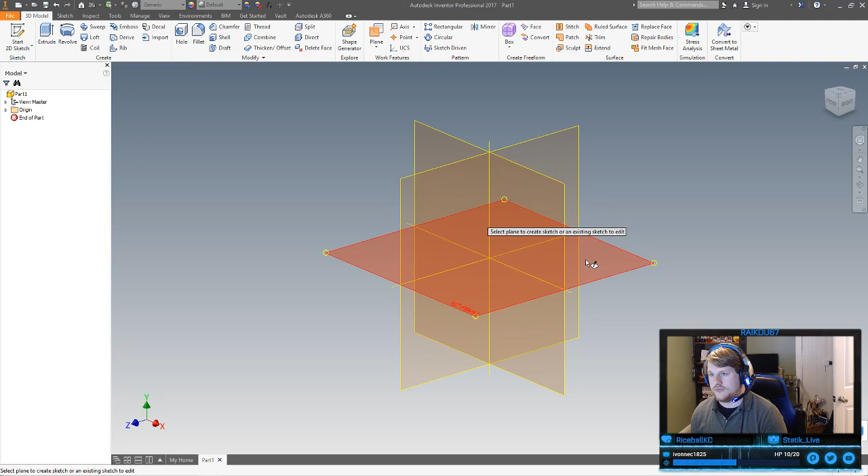Where is my image? There it is. Okay, so I've got general dimensions of the bat to go with here, and we can figure out how big we want it. Let us start base rectangle. I don't really have a good inch size, this isn't going to be to scale, so we're just going to ratio. We can always technically scale up if we need to.

So let's start this bat out with a 24-inch wingspan. And on the ratio of that to height, I'd call that maybe about 2 divided by 3. 2/3. Little smaller, actually, call it... or otherwise known as a half. We can edit that as we need to.

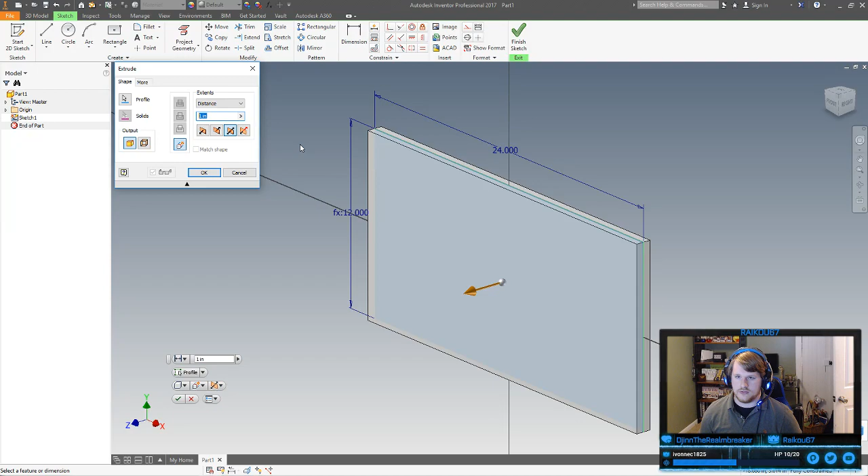That was not my usual defaults, unfortunately, so it's very different from work. Make the bat a good chunk thick, call it 1 inch, and we'll cut away what we need to.

Start on our shape of the bat. It might even behoove us if I was able to put this reference on screen. Unfortunately, I don't really have the time to deal with that. So, cut out our bat from here and get our general batty bat shape going.

Call it there, a curve going the other direction. Come on, we'll play around with those later. We'll get this mirrored on the other side too in a second. The bat has a tip to its wing.

Not the arc. Hold there, one very narrow fold there, continuing on with the same radius almost. Those will be pretty much tangent to each other when we do that. Okay, let's get some constraints going.

This will keep it separate, yet we can have a very slight curve to it. I'm not going to geometrically constrain that - it's the actual shape of the bat. It's more like a tangent circle, so I'm willing to say we could smooth this out later, but that is not what I want you to do.

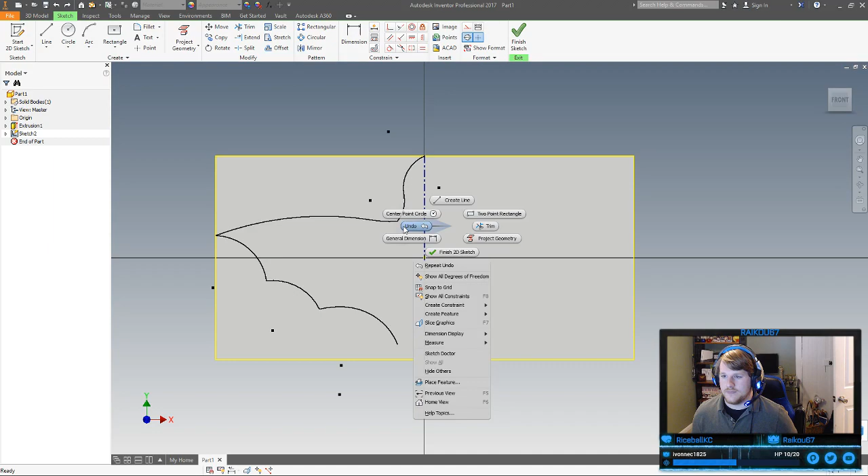We want these tangent as well, just a little curvature. Might need to mess with that actually. Oh no, oh no. Think about this - I might need an intermediate point. I'll round that out later actually.

Don't have to worry too much about that. We can get some ratios going here. Now the good thing about Inventor is it's a parametric modeling system, and what that means is you can set a dimension, and you can set everything as fractions of that dimension or functions of it, so as you change the size of everything, as long as you're thinking about how you're putting these ratios in, it should all scale pretty good together.

We'll use these as our two references: 12 inches and the 24 that we had before. How should we do this? One thing I kind of want to do - the edge of the bat here definitely has a ratio to this. Somewhat like that. We're doing a half bat for now.

This will be a function of... hold on. Might be better to say this divided by 2 is our half distance. Call it almost like 5/8 times 5/8. Yeah, of course that's gonna be a little funky.

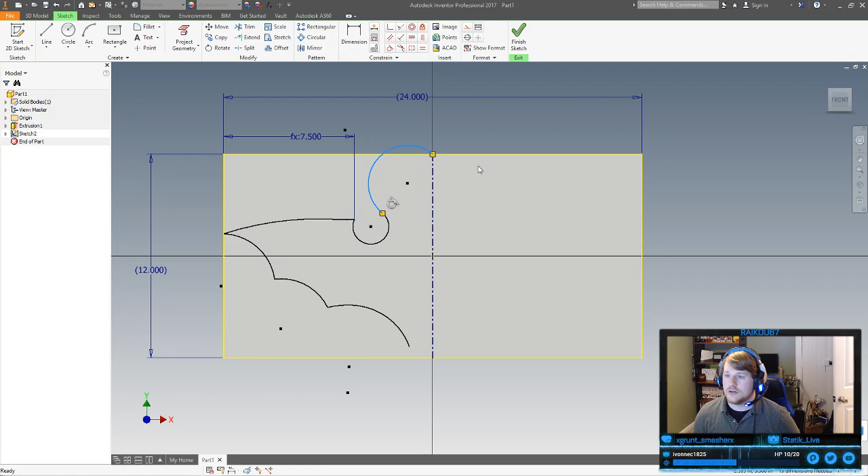We will put the center on here to ensure that's there. This will be funky for a bit, but this definitely needs to be a little bigger, so call it 7/8 of half. Nope, not quite. How about something like 11/16? Getting there. That looks pretty good, okay, good.

Got that - the tip of the wing. By 2, no, this would be like divided by 4 in this case. Yeah, because according to the bat it's actually kind of high. We'll get the peak of this. Oh no, we don't want a distance like that. Alright, now there is some funkiness when it comes to curves, and how we want to deal with them.

Now this is what I want to do here. I'll put a point here so I actually know where these are always. Start a little bit - that should not be a center line, it should just be construction. We can use this. This is divided by 4 over here, so we'll say this is divided by 4, similar height.

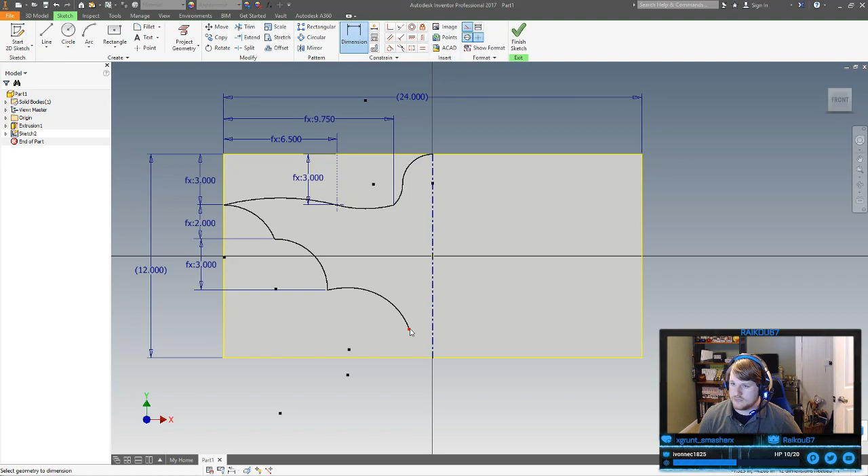This should be closer to the bottom, so we're gonna call this point also at 3. That's still within, but gives us a little bit of room. Oh, no you don't. You could still play with that curvature nicely. Good.

What's the next step? This peak down here is pretty low. Oh, because it's also constrained that way, the way I did it. Its wings are very small compared to its body right now - definitely very small compared to its body.

We'll make sure that this... it'd be nice if that was perpendicular to a line. You are not supposed to be a center line. Alright, so we'll make this perpendicular to control that a little better. Yeah, we'll definitely need a radius there. Very strange little bats.

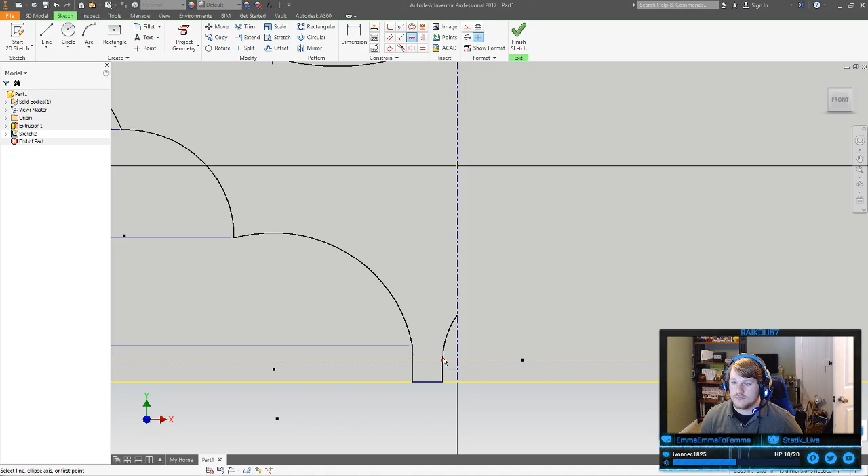Put a little curvature on you, or there. Keep it smooth. Make these same height. Right there. Decent enough.

We'll call this 1 inch of this. So this would be this divided by 24 in this case.

Question cannot be evaluated. Okay, try that again. Try this divided by 24. Ah, numlock. Where'd your numlock go? There we go.

That's not right. 1 inch. Okay.

Interesting. Unfortunately, updating things like that are kind of strange at times. 8.5, 1 inch. Still does it.

Oh, it's looped in on itself, that's why. Okay, we'll fix that in a second. As long as we got something for a start.

We'll call this half of that. He's got very, very little legs for a bat. Head is definitely too large still.

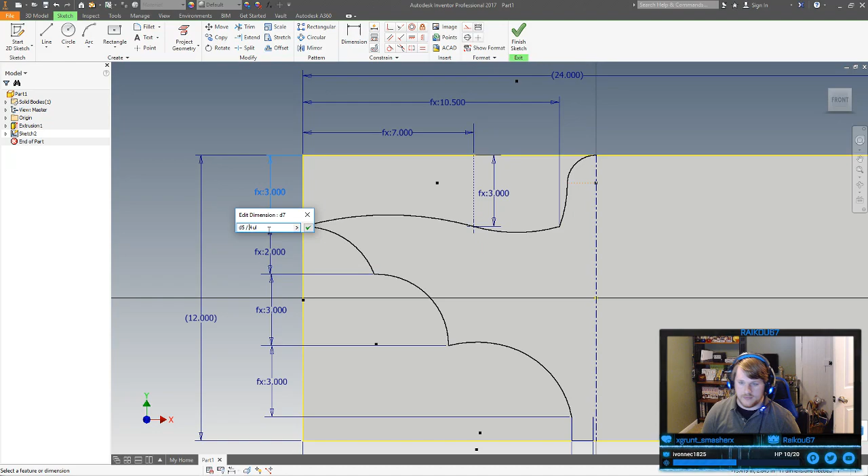Okay, so it's higher, so we can make you same height. We do want this to cape a little lower. Okay, so it's not too bad.

It's fine caped like that, but this will be a little bit bigger. It's exponential.

Good, so that's not bad. I don't actually know why we have a circle there.

Almost better, actually. It seems like we need a bit more distance between these before we start. Something almost flat.

Another radius. Just to make it a tight turn. Flat.

And one more radius. This tangent to this.

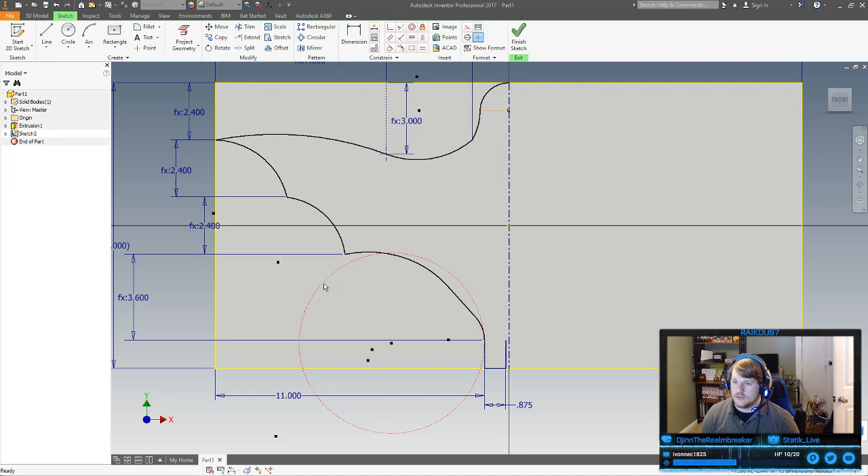And this shall be tangent to this. I don't actually know where this came from. Might have been what was causing our problems, to be honest.

This way we can actually... that should be tangent here. Okay, that's better. So now we can actually change

the length of this to where we need to go. Might almost be better to just kind of lock these points where we need to go rather than start doing things like that.

Just start this process of more like sculpting it. There, take that point, lock it. Starting to throw some of our parametric design out the window.

Purely because it gets kind of difficult to do all these ratios and whatnot. Okay, so that constraint already exists. Good.

Should be able to just manipulate that to where it needs to go. Except that needs to be a little bit smoother.

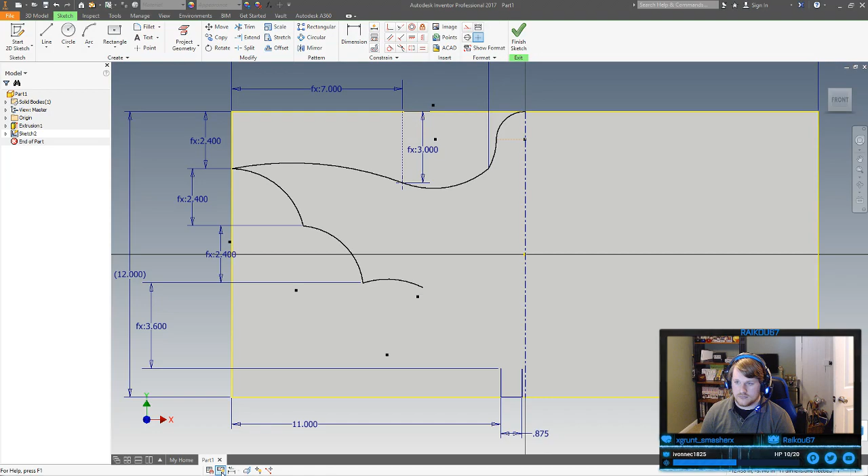No, that's not working at all. That's just not working. Where's that dang constraint? Oh, it's gone already. Okay.

You're a free little one. I think you're still 2 pieces. Yeah, you are. Okay.

Just go back to constraining it this way. This. Darn you, why do you do this to me?

You know you could do that just fine. You choose not to.

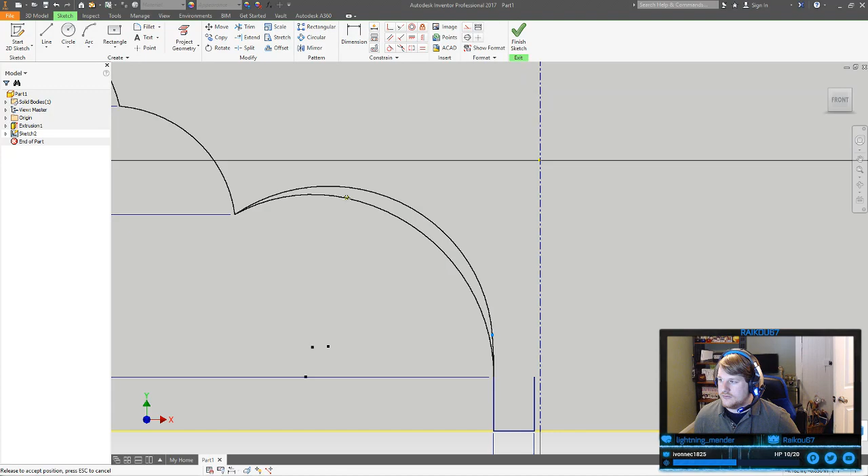Please, yes, good, okay. Got this very steep curve for the time being, but we want it more like flat.

Our main problem is it actually doesn't connect to the foot curved. So once again, I find myself deleting this arc.

Might be better to just kind of move on to something else in the meantime. Change our design approach. Spend all this time doing those parameters and they actually end up messing with us. Going for something more organic after all, so parameters aren't going to always work.

So we'll make this one locked for the time being, or better yet, just 1 inch.

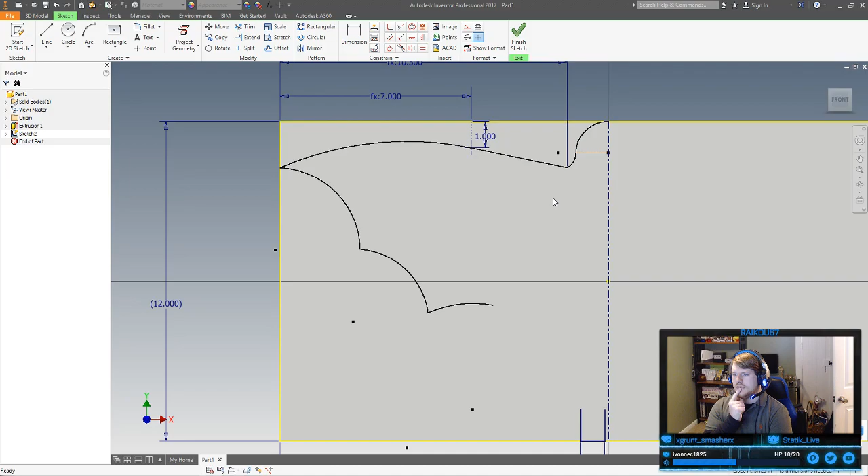I just had an even better idea, a different way to approach this. Hold on, I've been looking at this image the entire time, but there's a much better way to do this that doesn't involve me guessing at proportions.

Sketch again, we'll actually put the image file on here. I can find where image is. We don't even need bat ratio, we can just put bat in here. Input from corner to corner. A little batty friend. It might even be better to constrain you to the midpoint.

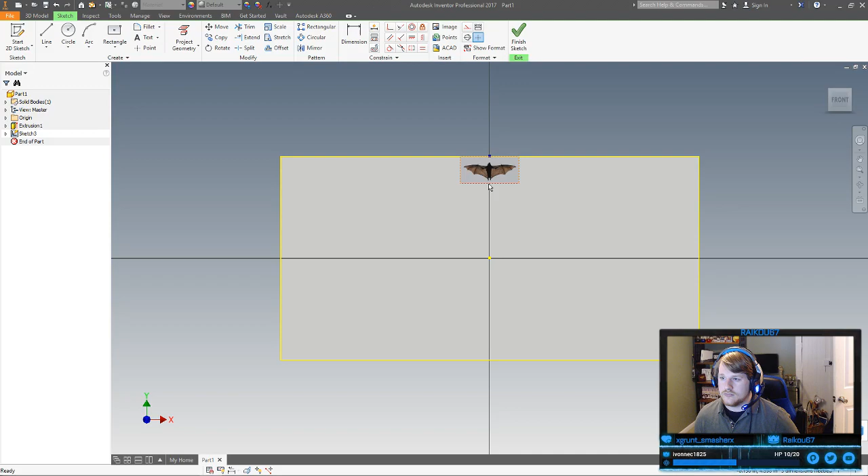It's close, actually, it's very close. Oh, you know as well as I do that that works. Don't even try to tell me that, inventor. And we shouldn't be able to change anything about that. We'll note that we need to add at least half an inch each side.

So about plus 1 inch. Oh, that's the ratio, it's messing me up actually. The ratio should probably be more like 12.5.

It needs to get narrower. 11.5. Almost. I think more than anything, actually, we'd want - no wait, we did want it bigger, so that the wings are almost at the edge. 12.75 should do it.

Pretty darn close, might take an eighth out of there. Yeah, because then we get that tip going at least. Good, so take this, we can - I would say decal it, but it's probably better to just start a brand new sketch now.

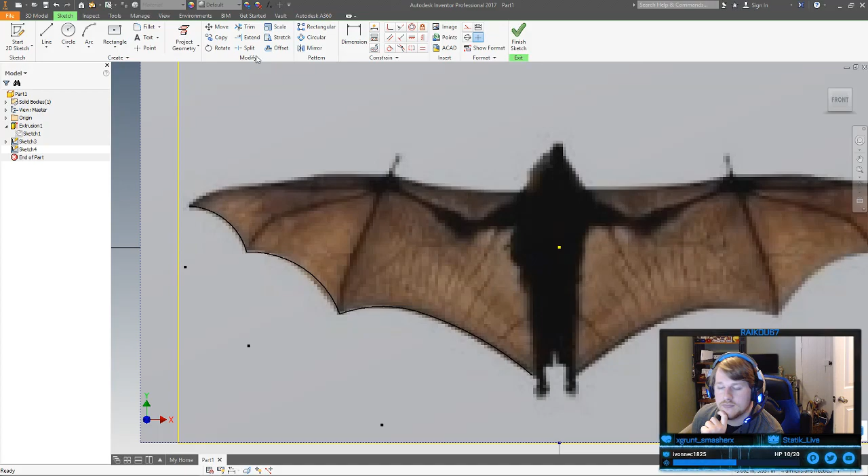Okay, we'll ground some of these points before we absolutely mess up. Ground, ground, ground, ground that, and ground this. Start from this point again. So somewhere around here, we will have to note that there is...

Oh, not quite, not quite. Something more like here to here, because I see a slight curve. Here to here, there's a slight curve going upward there. Come on, you, you know you can do it. Mess with you later then if you're gonna be like that. Here to here. About there.

It's not bad, it's not bad at all. So we can always round these things out later. Let's take some grounding points. Good, good. It's just so we can mess with the curvature later, as long as we know we have this, we can mess with that.

General shape of a bat. How strange, very, very strange. I mean, we can even take this image now and flip it horizontally once we get something centered. Doesn't have to be perfect, just close enough.

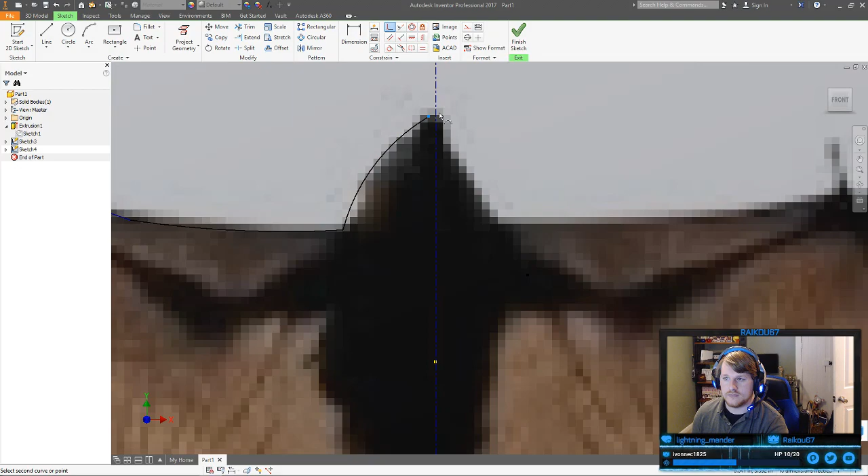Project that. Get the center line here to here. So I will have to - I don't think I actually did anything with that. Just close enough on that.

Comes to your little feet. Pretty much square, but not quite. Yeah, I'll have to mess with that a little more later. More like now actually, we can even just put a radius on that, by locking this point down.

Adding a little more curvature. Not perfect curvature, but enough to get a general shape. Good. Oh yeah, our ratio is like way off compared to this entire thing. Okay, that's fine, as long as we got something.

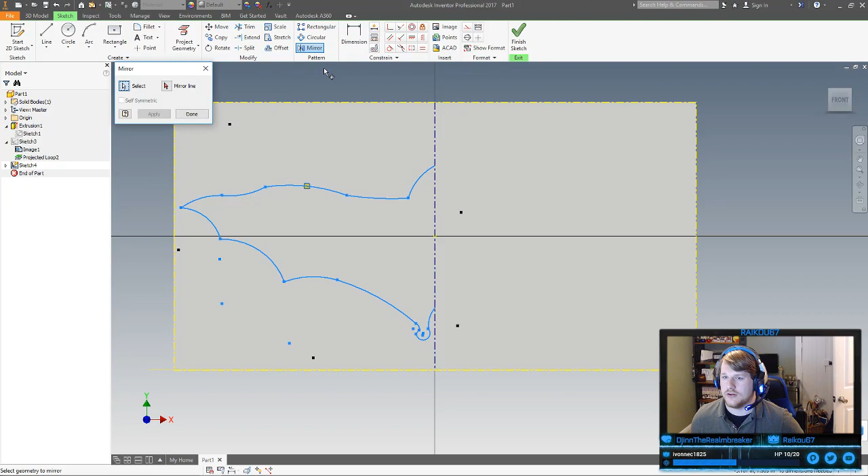Now we should be able to take everything from this side, mirror it. Find where the mirror tool is. Right there. Mirror line right here. Apply it. Done. Good, that's looking pretty good. For a start, of course.

We gotta refine this, so with that finished, take this. Should actually have a closed loop in here somewhere. There, wait, I see it. Come on, you, trick is trying to get it. That, especially when you're working with such curves like this.

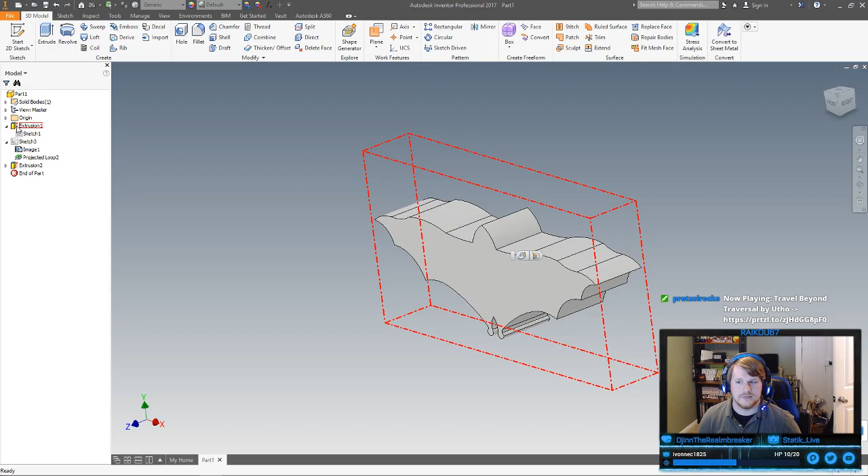That would be our bat. We do the intersection, leaves us with this very, very thick bat. Arguably too thick. Change you down to like 3 inches. Maybe again 2 inches. I say 2 inches would be pretty good.

Cool, so we've got the cutout of our bat, and we're ready to start doing a little bit more detail work, I think. We'll start doing a lot of molding with this thing later, but for the time being, I know we can fix small little spots like this pretty easily.

Well, like a quarter inch radius. Okay, maybe not that much, call it 3/16. Good start, a little fillet to - nope, not that edge. This one, so we can add the fillet. Same operation here.

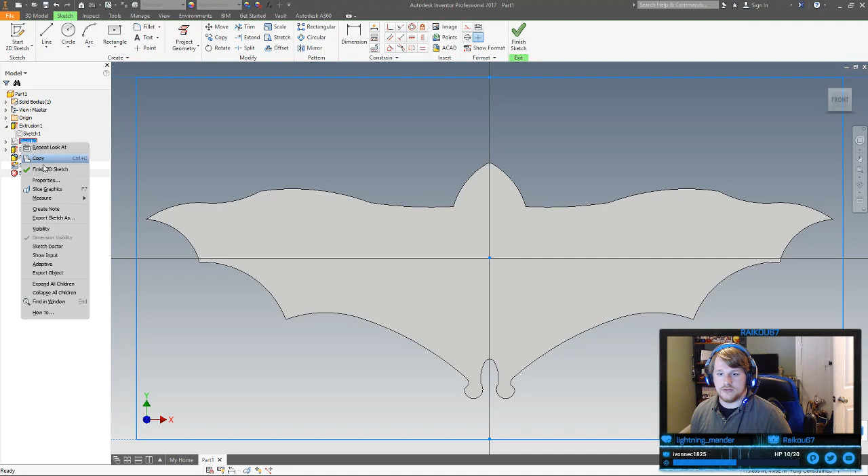So we're actually going to start carving out what the body is out of this. This is where you will be valuable again. Kind of do it again. There to right here. It's the center.

Ah, darn. Unfortunately, I've picked the center line still. You're still on the center line, and I don't want that to be the case.

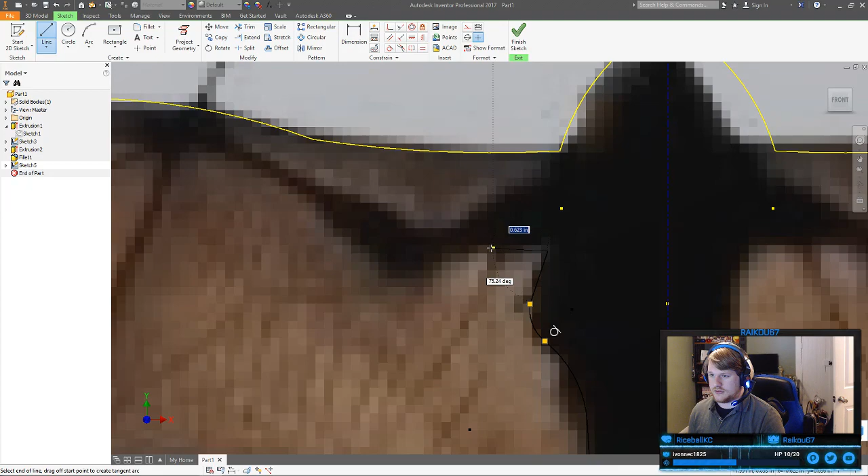Right, there, right. Here. There, to here. Unfortunately, I missed this one a bit. Too much.

For the radius, there, to bring it down for the spine joint, about there. About here, and then finally down here. This side, similar.

Like that. Almost the entire way, but not quite. Like this, almost the same. That missed horribly. There. I do want you to stay tangent if I can help it.

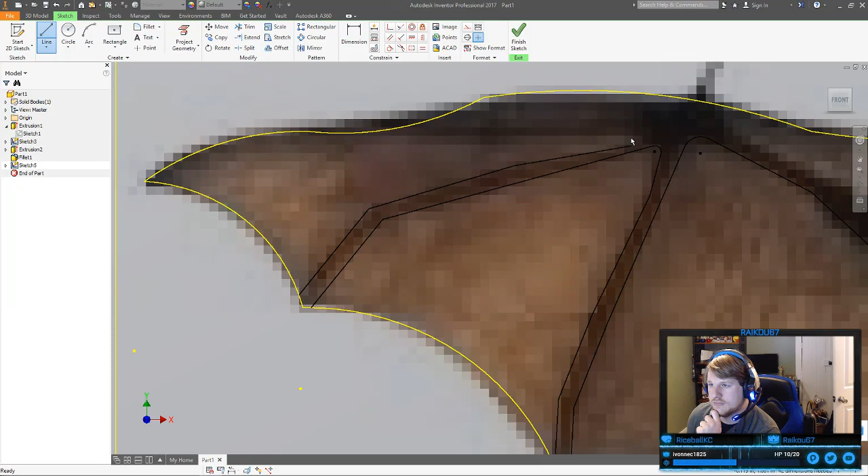There, here, there with a little radius here. Oh wow, like no radius happened there. I don't even know if there's anything there. Just form an arc, tangent arc.

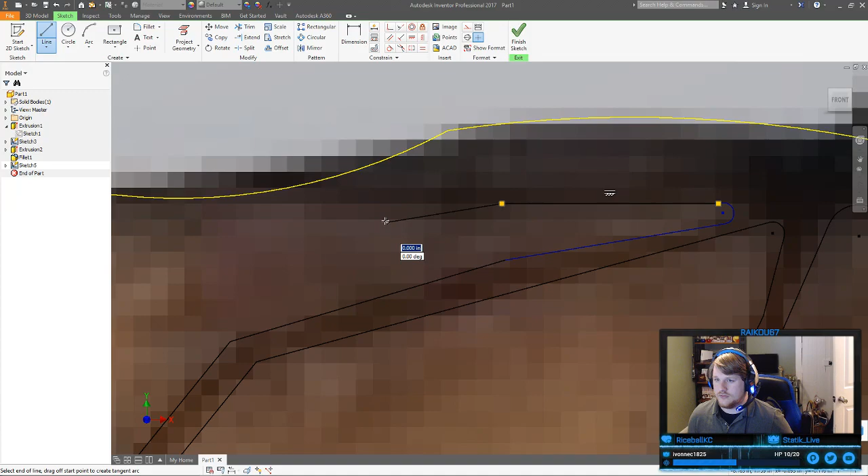I have to ground that, aren't I? Oh no, I'll do that one. Oh, fight me, come on. Don't you dare fight me. This, like that, eh, good enough. Or like this to that to this. Close enough.

From here to here, over here to there. Almost flat across, for not getting the horizontal. Here, a little bit of shoulder. It's a good start, I'd say. A little bit weird on the rib cage. It's okay if it's not perfect, we can get an average from it.

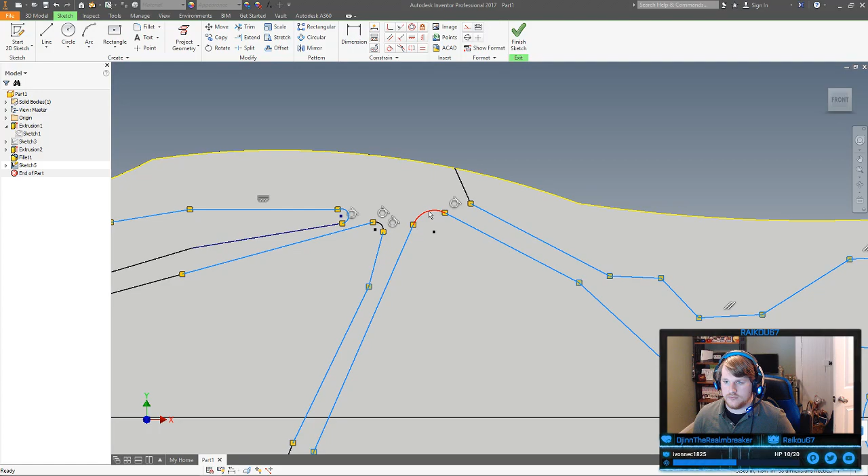So once again, we're going to get rid of these. You're going to make me select individually, aren't you? Better yet, take it like this. 1, 2, 3, 4, 5, 6, 7. These. Just highlight the rest.

I don't think we're missing anything there. Ah, wait, there is. Okay. If we're missing anything, it really messes everything up. Do another mirror move, this line. Apply it. Done. Whew.

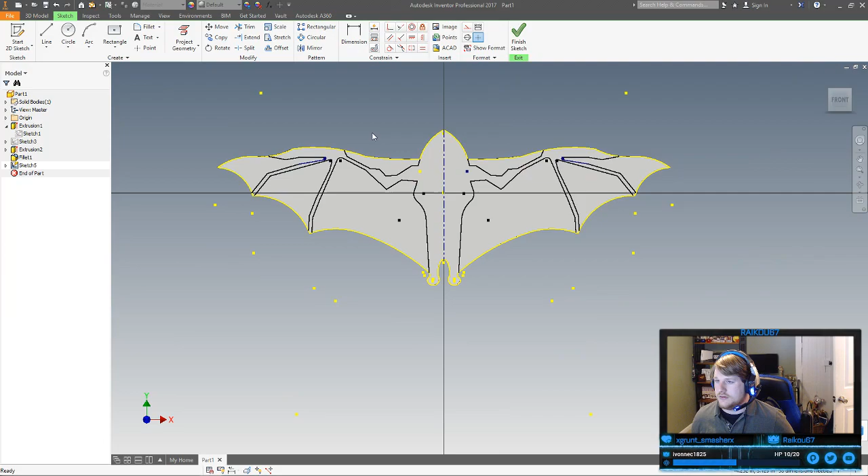Our little bat's starting to shape up, very crude, but it is. We're actually going to take these gaps instead. Not everything's connected over here. Do it a different way then.

Move that mirror operation, and then we'll cut things out again. We're not going to go all the way, say maybe about an inch in.

Give it some texture. These guys' wings are pretty thin from what I remember. We don't even have to remember, we can just put a reference going. Yeah, not really a very good reference there. You can kind of see it on the tip here. Yeah, we've got a hat in there too. Very thin, very delicate.

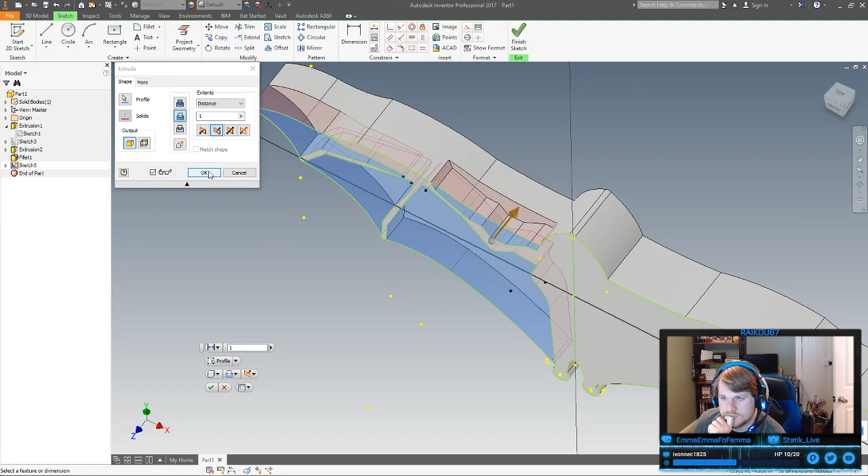Take this, mirror it a whole different way. Just plane, because everything is centered. We're starting to get the shape. Good. Definitely have to blend some more things together.

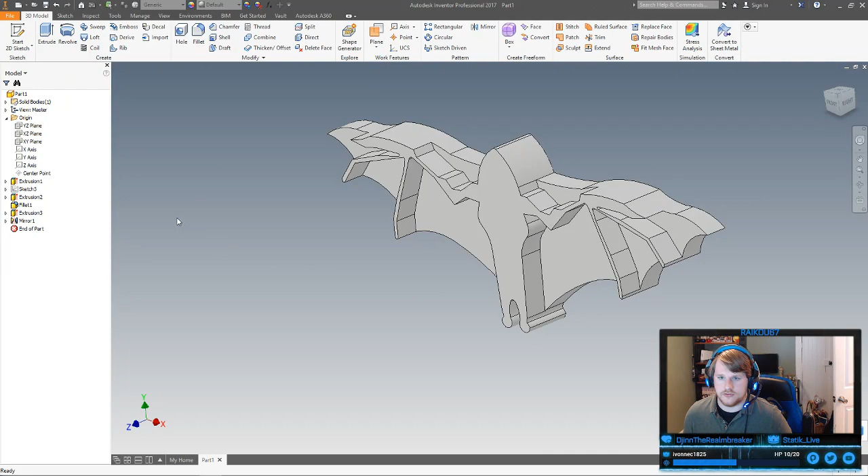Next step would probably be... well, these veins aren't actually supposed to be this long, now that I think about it. That's one thing. Is that maybe this should actually be a lot thinner than what we're doing. Let's revise this once more, like an inch. I mean, at that point the bat looks a little thin, but we can block him out a bit more, so that's probably the next thing we should do too.

Because we have a lot of this existing geometry, we can kind of just work with what we have. Here, we'll do it this way. Just pick the geometry we want at that point.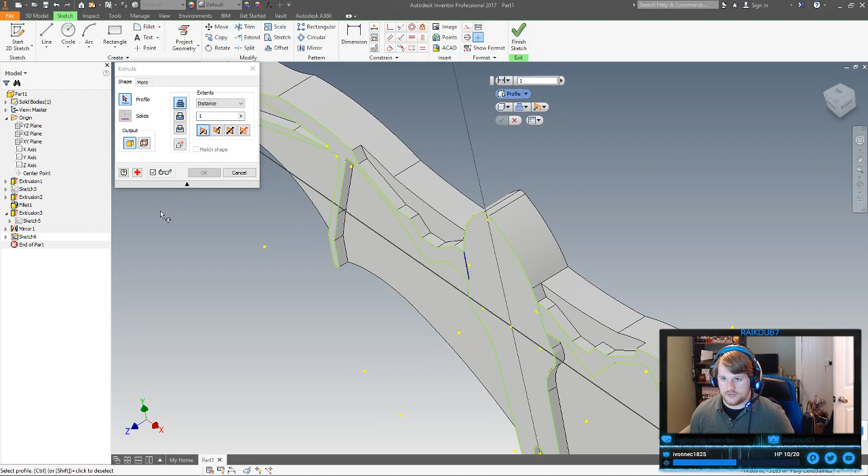Where are you? Right there. Here. Got a nice solid feature here. We only care about... ooh, something's not connected there. Not connected here or there? Either. You're supposed to be connected.

Redo that line then if you're not going to connect. There to there. Okay, once more. There you go. Profile, good. Bring you out like half an inch.

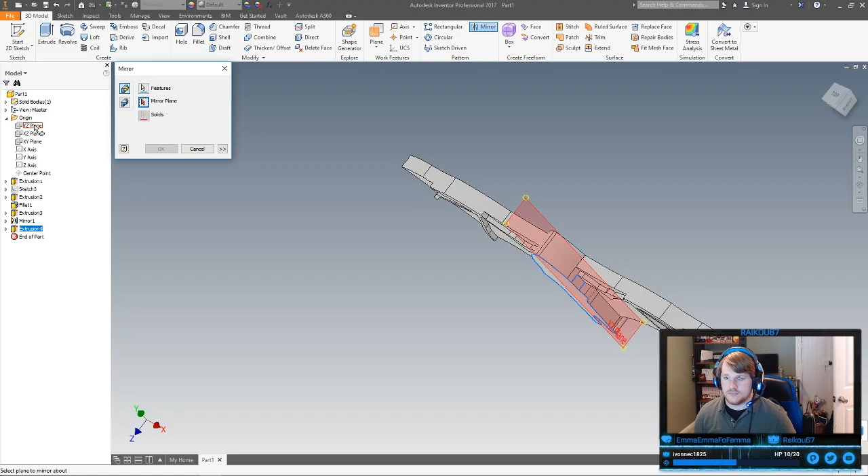Probably on both sides even. We'll mirror this extrusion on this side. That's not the right plane. Want to mirror on this plane so it comes back a little bit too. So now we've got the wings in the center of the bat, and his body's thicker, but his wings are thinner. Good, good, and we can actually even make those wings even thinner, I believe.

Just do a little more, make him a little more delicate.

Now, well, I'm not sure. Okay, so we're going to look at this other bat reference, the other bat references we have. They definitely bone out a little bit. Oh, we already have that one. They definitely bone out a little bit, so they are transparent if you shine a light through it. But most of that structure is on the insides, but they're going to have a little bit of protrusion outwards when they're doing it.

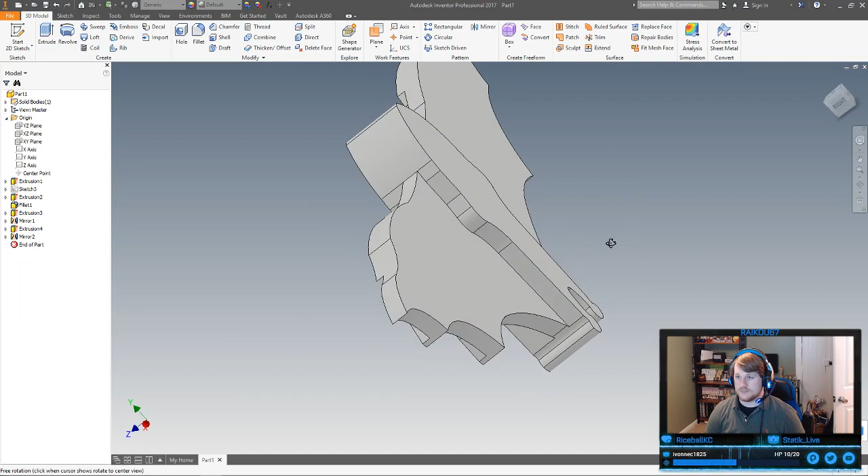We'll take this, we'll say that's going down. Probably sketch on this plane a bit. Utilize this, utilize that. It's really just the points that are coming out.

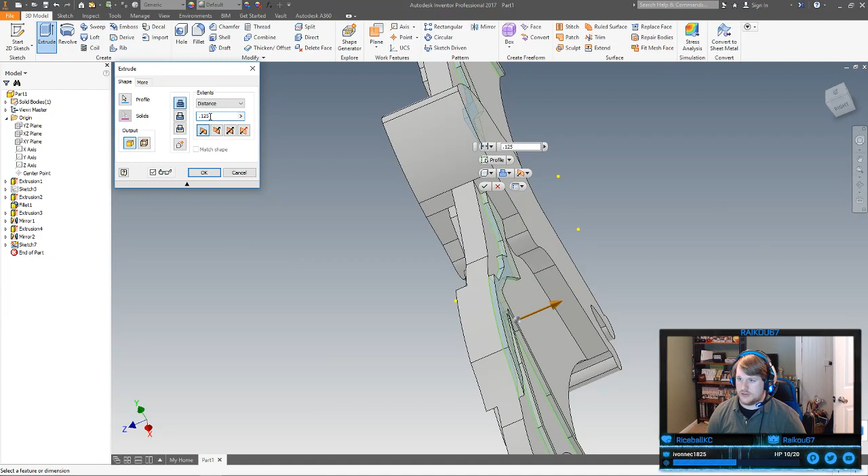This being the front of the bat, this being the face, this being the back. It's not too bad.

Alright, from this point we haven't done any saving either, so that would be good to save. We're gonna do this as bat, animal, and we're not gonna finish this in one stream. I already know that the whole thing, the bat, the hat, the baseball bat, probably not happening today. This is a lot of trial and error that's going into this right now.

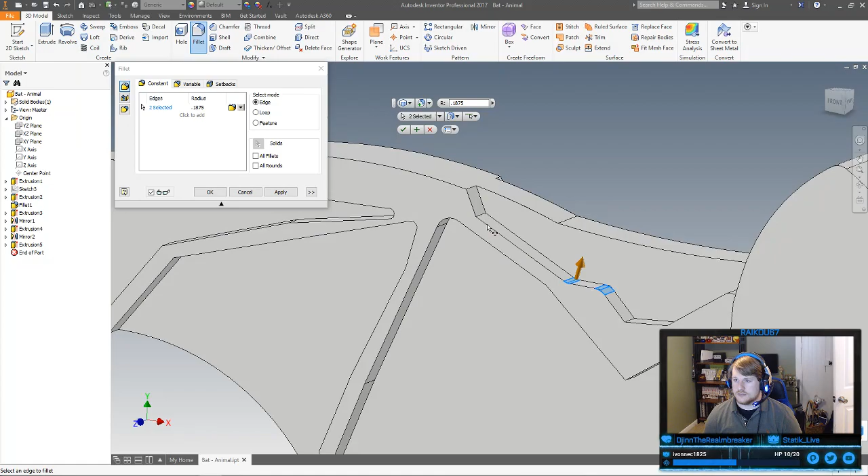Would be good to get general bat features in there though. Let's start working on rounding out some of these harsh points. But, well, I mean, that'll work too. Pretty much everything's gonna need a fillet.

Just little by little. Round that out too, because it's a little tough. There's maybe a little bit we can extrude out of there.

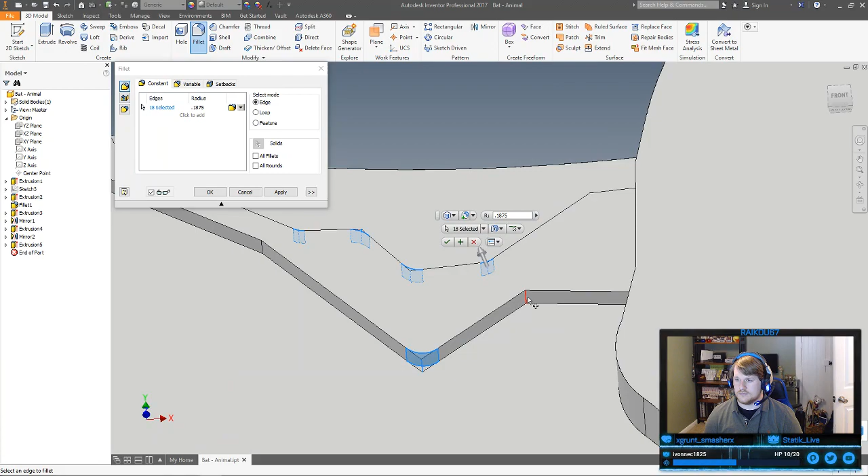See how we feel about this if we were to do this as like 0.5, just as a severe round. Maybe even more, to be honest. Might be good.

Isn't the most efficient modeling, because I should have done this a little sooner. I should be able to mirror it again. Yeah, no problem.

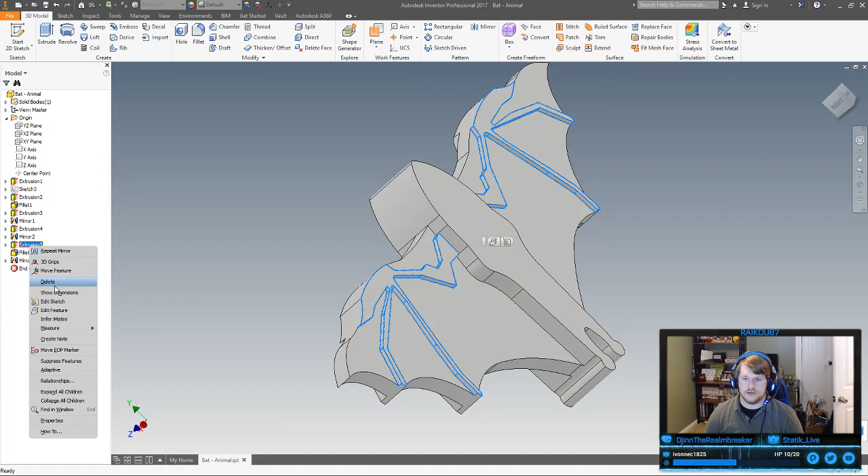Don't think we can mirror it on the mid plane though. Oh yeah, that already looks a lot smoother. Good, yeah, the back plane probably should have done that first. Here, we'll actually delete that extrusion so we can try once more.

This and that, get all the radiuses on the backside then. Extrude that out. Good to go. Yes, much nicer.

We'll do the next round of this, which is going to be a lot smaller. Yeah, a lot smaller than that too.

Just kinda realizing that this thing is not really... yeah, come on, you know you can do that. Alright, if you're gonna be that way, we're going to actually change you really low, just so we can grab this radius.

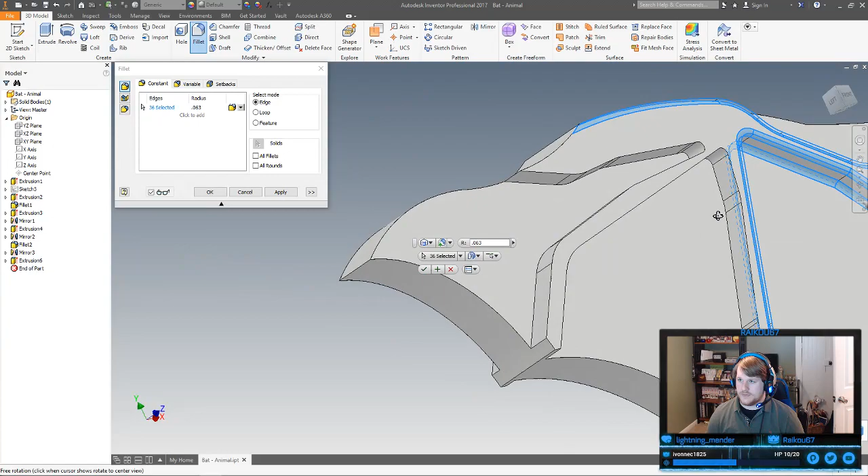Yeah, some points are on the thinner side. That's not going to exactly work because of these little thin spots. We can fix that a little bit by making... well, unfortunately, I screwed myself there.

So take the lock off of it. Just kind of... ooh, no. Eh, better off leaving it as is. Working with it.

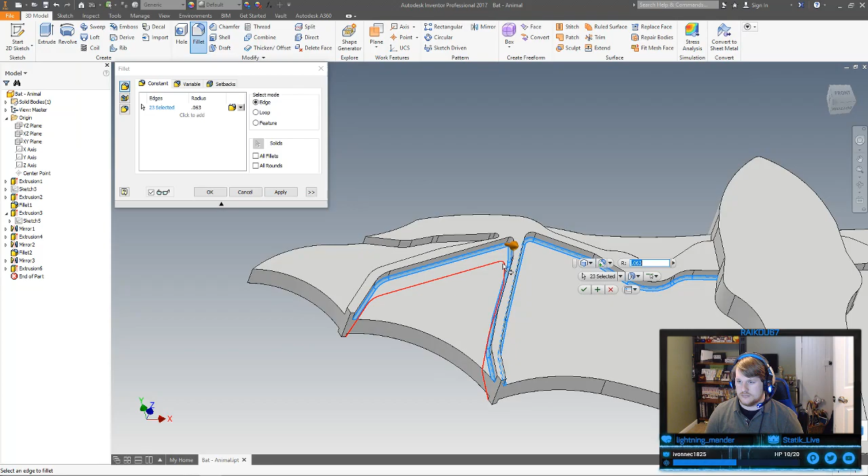Which might have to be a little bit different about how we approach this. It's nice when they all line up too in that area. Just get the whole edge.

Oh, Waz, how you doing, sir?

3D printing is definitely a possibility with these things. It's really just a matter of after you're done with it, if you save it in a certain format. I do not own a 3D printer, but it is definitely a thought for the future.

Not cheap, unfortunately. Right, I already see that there's going to be a problem here. Oh, apparently there wasn't, so we'll keep going then. Once it turns red, there's usually an error.

Yeah, we're just kind of trying something a little different today with some 3D modeling. I do this day in, day out at work, and it's something I'm decent enough at where I'd love to share it with everybody here.

It looks similar to Revit. It is, this is Autodesk Inventor. Revit is similar, it's another 3D modeling system. All of them start to look the same after a while. It's really where your tools are in your toolbox. The whole logic's the same. Autodesk, so I shouldn't be surprised.

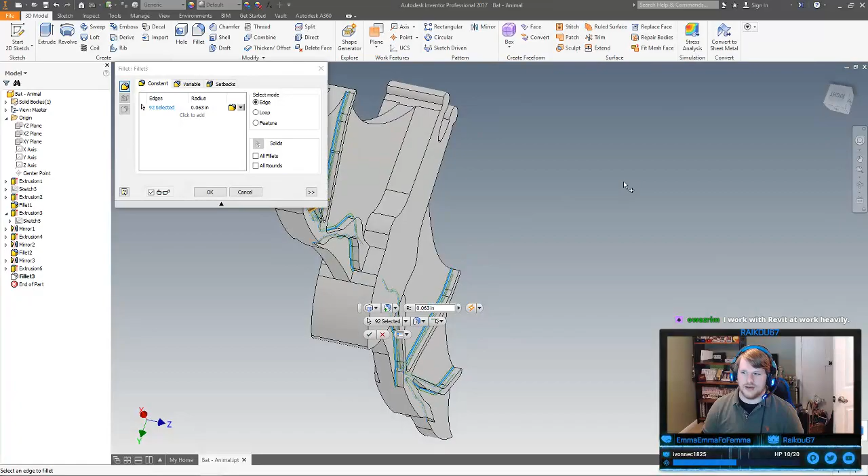I got a free copy from work, so yeah, Autodesk Revit is... yeah, there's some from the same product line from what I remember. You work with Revit at work heavily. Okay, good, so you're someone that works with spinning things around in weird angles then, I'm sure too. Having to look at it from every freaking angle.

Alright, a little softer. Is that gonna work, or are you gonna throw an error on me? Looks okay, we take off the... oh, my view's not here.

Unfortunately, I don't have everything set up the same way as at work. They just do shaded, can't really see those lines. It looks pretty nice, but we'll keep the edges on for the time being.

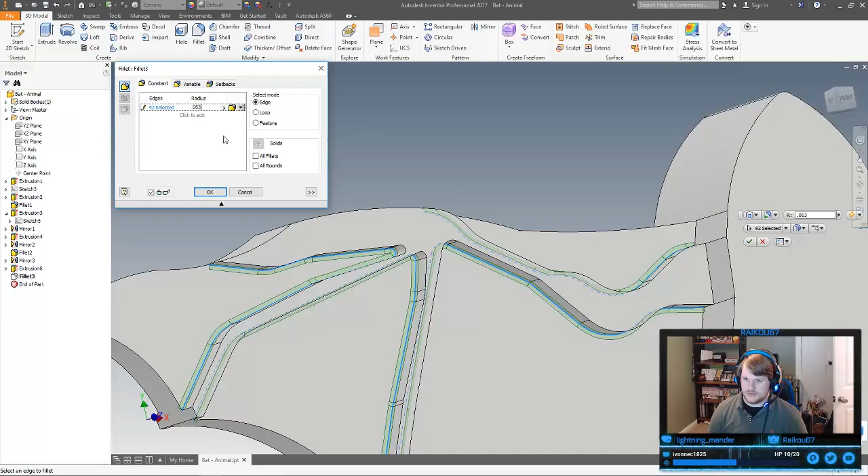Oh, there is actually some fillets that I missed, it didn't generate. That's one, usually it throws an error, so it's very strange that it just flat out didn't do it in some spots. It's definitely a new one. Get some of these top ones too if we can.

Yes, we are taking on our good old friend Spanish Vanguard's challenge of doing a 3D bat. Their very first creative stream. It's also our first time using Pretzel for music. Let's see if that actually generates. Okay.

22 edges can't be done, okay, so we'll cancel that and we'll have to do it separately. Maybe we'll round it out a different way.

Now, unfortunately, Inventor itself, not Autodesk, I think Maya is actually in the Autodesk family, doesn't really lend itself to organics as much. It does have face modeling and whatnot, so we'll try and play with that a little bit, but not sure how easy it would work out in Revit. Again, I'm not as experienced in Revit, but if it's anything like Inventor, it would probably work decent.

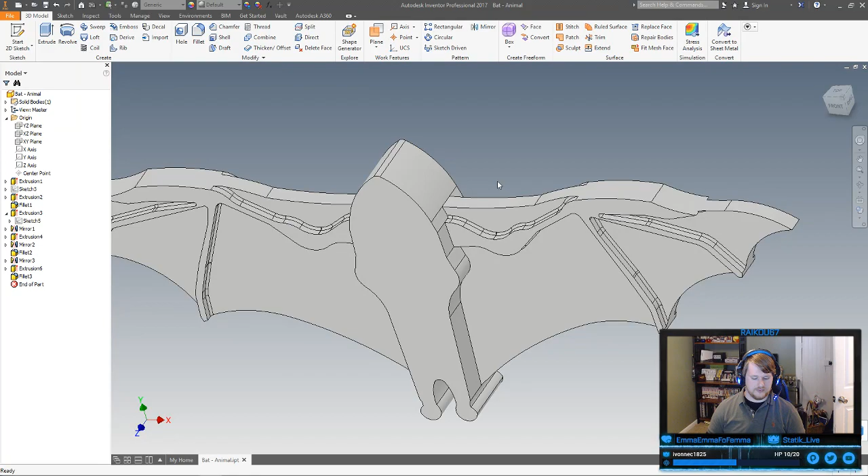You might have to brute force it a bit, like I'm kind of doing. Maya would probably be the best place to do this, because that's actually designed for game designers, and you can flow a lot easier than you can in Inventor. But it also doesn't have a lot of libraries that Inventor has.

Just trying to figure out how I want to continue the softening process. One thing I can do, I could take these fillets, and I believe I could just transfer them to the other side with a mirror if I place it well.

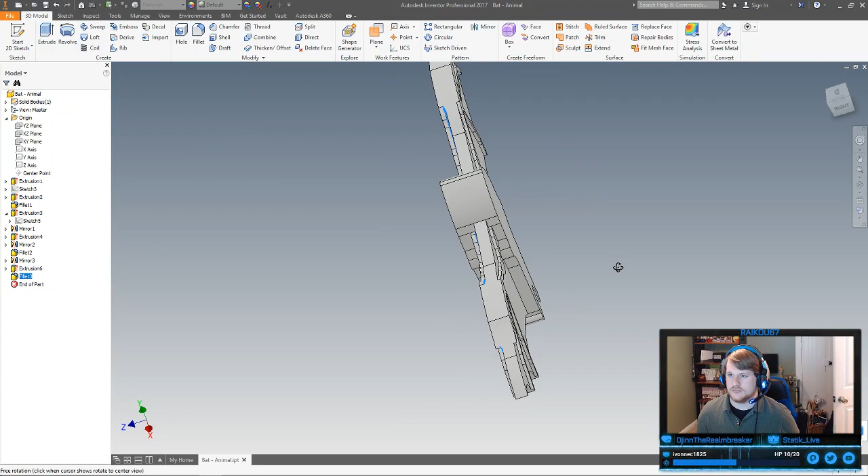No, maybe not, they come in too shallow. It's okay. But I accept a challenge. I'm convinced that you could still do something decently organic in Inventor. It just might not be as easy to do.

And when it comes to these round edges here, it still feels too thick for a bat. For the wings. Like very, very thick for wings. Alright, that's a little better.

Extruding and voids would be the way, not sure about fillets. Yeah, fillets work for general softening, but of course they have their limits, because if things clash, they're not gonna work. I'm guessing these are curved voids. I guess that's a way you could think about them. They're just kind of rounding out, putting a radius on the, where two planes meet at a line.

I think it might be better to save this for when we go to try and surface model this in freeform. But I gotta figure out how I want to do ears on these guys, because they do have very cute little ears.

Facial features and ears, that might be better modeling it. Well, I mean, everything's modeled here, let's be real. Yeah, not sure Revit can do fillets. I mean, if it can do sweeps, it can do fillets, because it's basically like sweeping a curve along the entire edge.

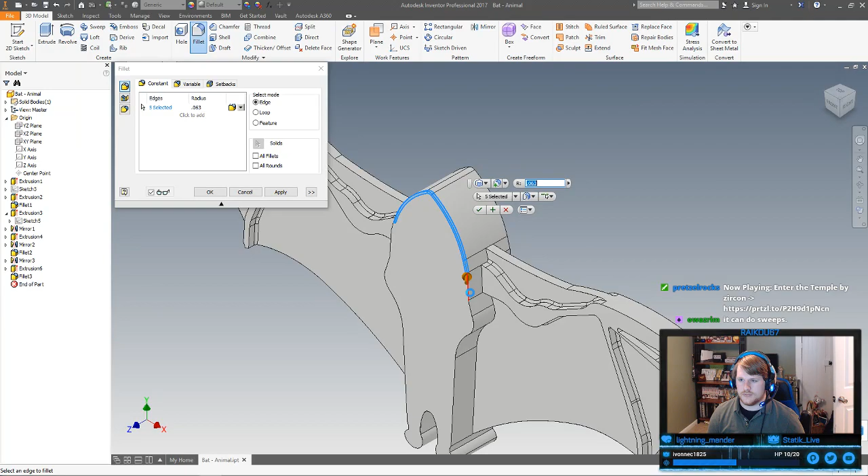Alright, we'll start rounding out some of these edges instead of the actual body, because he's not going to be a thick boy.

Seeing some errors already, though. Might not take. Might be due to these discontinuities. There, we'll try and fix those first. Soften them out ever so slightly just to get those discontinuities gone.

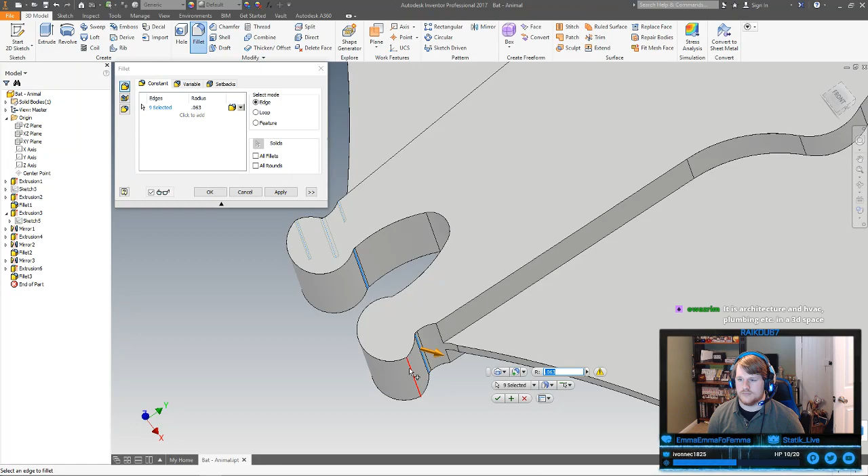That one's already continuous. Unfortunately, the way I started this out was relatively messy. That's already continuous, that's continuous. This isn't, that isn't, this is. That isn't, and that's already done.

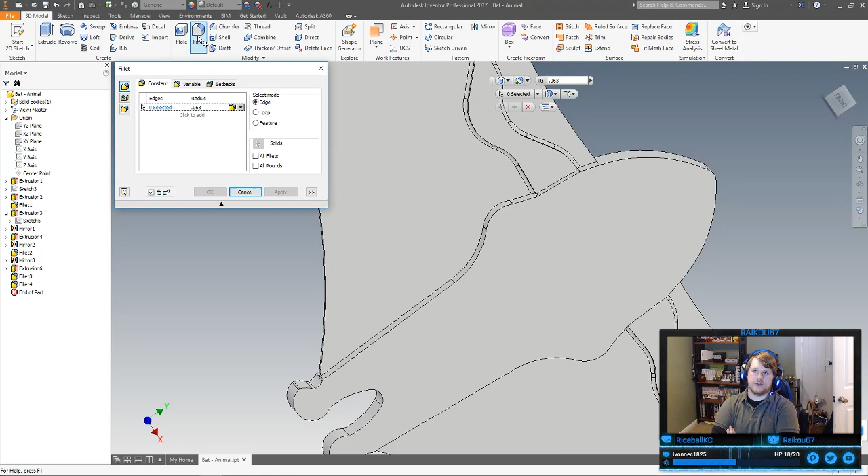It could do sweeps in 3D, it's architecture, HVAC, plumbing, etc. in a 3D space, so we see all the walls, doors, windows, etc. and structures, so everything can be coordinated before it goes out to the field. Okay, so yeah, you're still working in 3D space. In an environment like that, it doesn't sound like you would really have a big use for softening edges with fillets or even chamfers, so yeah, I can see that.

Alright, so we know we can get this much going, and then it starts getting discontinuous here for some reason. But it works fine now. That is so strange that that was not working before, but now it is.

Heavy, heavy, alright, not too soft, huh? You only want to go so far with me. Okay. Well, no, that works, but I do need to continue the fillets on the other sides here.

Anywhere there's discontinuities.

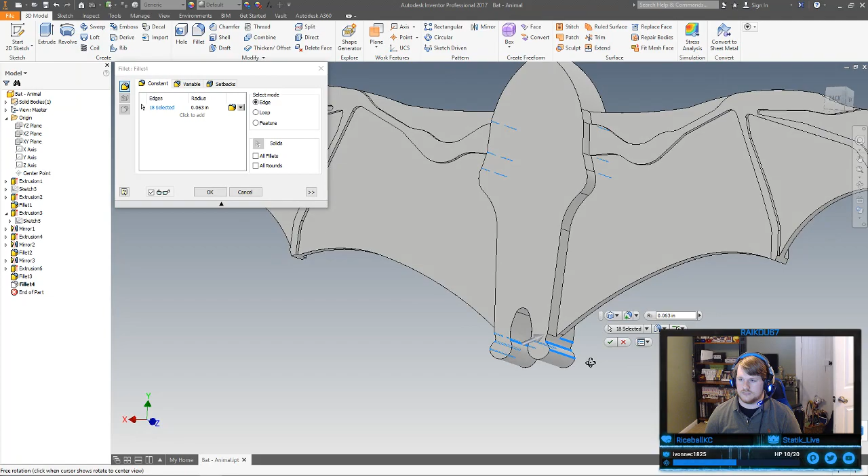That's not going to do anything in that one. Alright, it's a good start.

Yeah, it was probably because we were getting too... This is still going to be very rough right now. As long as we could start getting some curves in there, that's going to help in the future, I think. Should, anyway.

Yeah, some architects get a little too excited and make things way too detailed, and that's kind of what I'm trying to avoid. I think this could be a good spot to start. I know not everything's softened up, but this could be a good spot to start playing around with...

Hold on, let's see if I can... You're not going to let me select everything, are you? It's stupid. Do it this way, then. Invert all of these. Oh, you're not going to do it to me either.

Oh. Oh, wow. I really hope this doesn't lag out the stream, actually. Oh, wait for it to respond for a second. Dang, okay. Yeah, that's one problem with Inventor, it crashes very frequently, too.

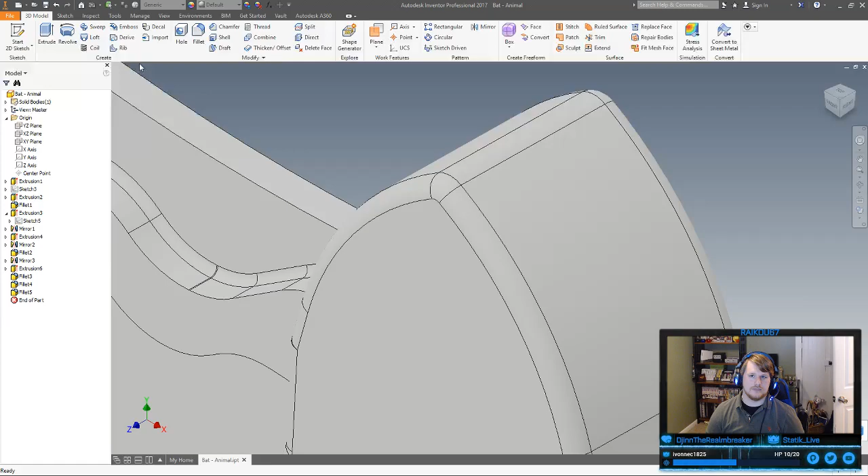It's usually a setting that allows you to do it. What a fine mess you have here.

I'm actually gonna try that one more time. It's gonna really screw everything up, I already know it. But I might have made it way too soft.

But also the problem is that it's right now trying to do 4 faces in each direction, which obviously we have a lot more faces than that. And we'll see what happens. So yes, it's going to go through this black screen again.

That looks nasty. We're going to have a very fine mesh, like 32. It might be too much to calculate.

Wish I had a copy of 3D Studio Max, can really do some nice stuff with it. It's really nice having this home copy, I'm not gonna lie. I might have to go a different route with this.

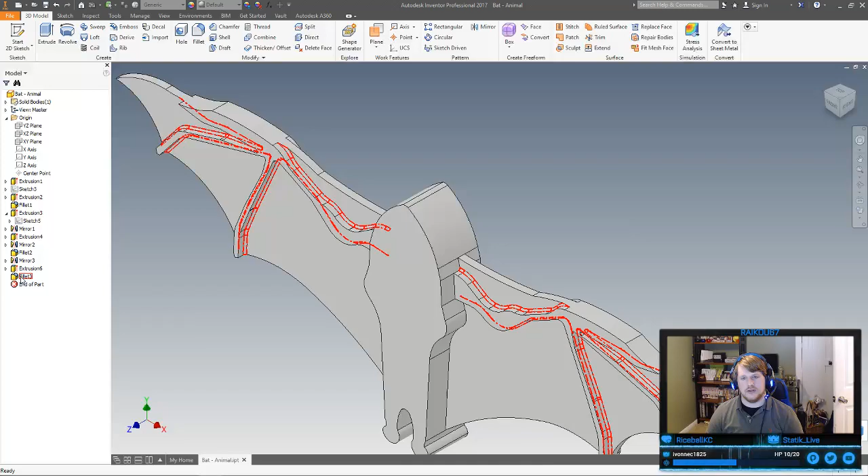Alright, we're gonna try something a little different. We're gonna say screw it to the softness on this, and maybe even on the wings here. We'll suppress it for now rather than get rid of it.

I might have to undo a lot of softness in general, actually. Yeah, I screwed myself by trying to make everything soft already. Because of all these dang curves, it's screwing me.

Alright, well, save here so in case something happens, we can go back. We'll take off some of these big fillets that are screwing with us like this. Yes, it's going to mess with the extrusion. So it's going to get rid of the one in the back.

Actually fixed it rather than got rid of it, so that's good. And we'll try one more time with trying to convert everything.

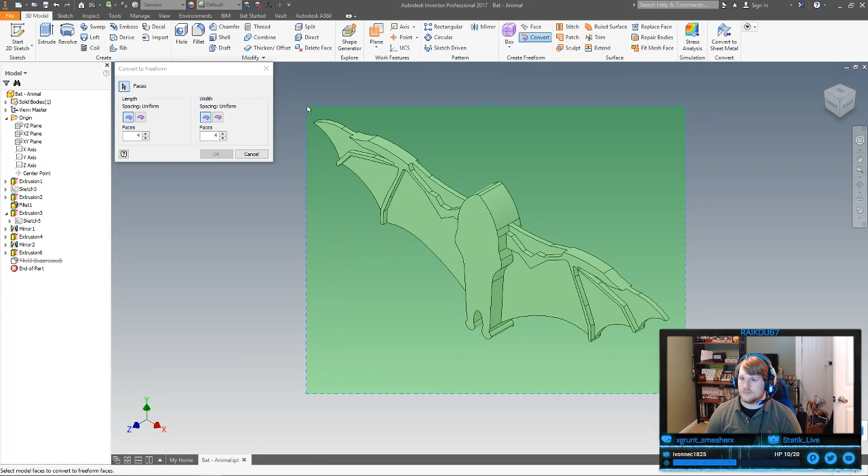As I said before, this is trial and error. I'm not used to working with organic models. But I believe the best way to go about it is to convert everything into this free form. Yeah, it's all these dang curves. So if I were to say okay to this, do they come out as all these curves still?

Maybe. Just, yeah. Wow. Yeah, that's actually not what I wanted at all then, is it? It would really suck if this entire route of modeling was actually not the correct route.

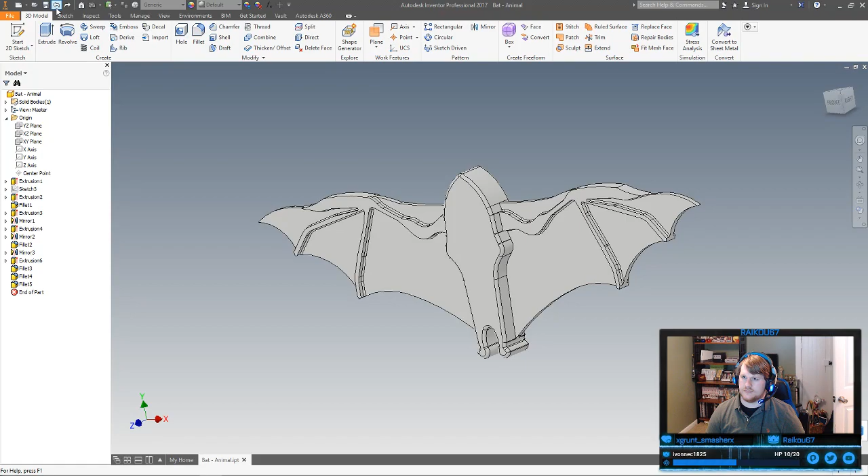Might just have to go with some very different modeling techniques then. We'll get rid of this and try it a different way. This is totally not turning organic anymore.

I need a plane, I need a flat plane, a little bit higher. Take this plane, tangent right there. Use it as our working feature.

So we'll have this. Nope, that's not quite where I wanted it to go. So if I cut it away, it's not exactly where I want it to go either. Try and... oh, I'm not even projecting anything. Okay, one more time.

Never let it be said that I didn't try with this, at least. Especially if it doesn't come out super professional, but like I said, I accept the challenge.

Oh, nobody wants that. Okay, fine, maybe we'll try it a different way. We'll go like this and this. If I put a point right where those two intersect, that should be considered area. As long as they don't move.

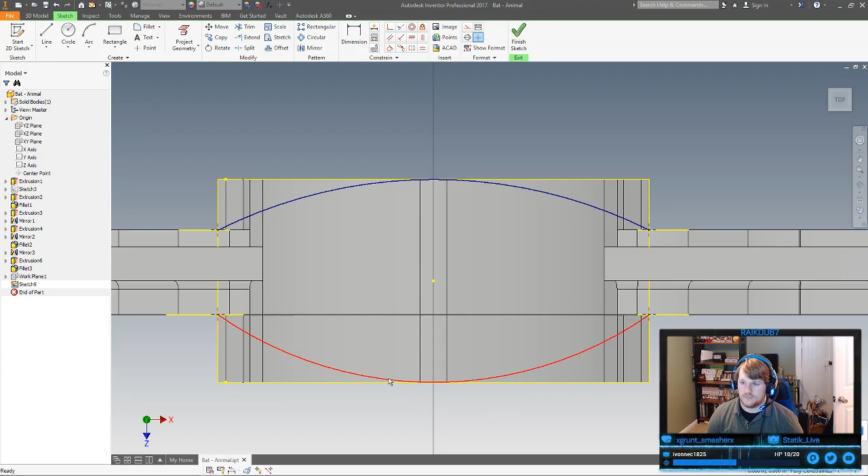Kind of like that, just to profile it a bit more. What's not... okay, you're not considered... there. We'll see if that works. If I...

Now, none of those are closed loops. Okay, see if you can close it for me. Close the loop, please. No, it actually didn't close it. Okay.

Oh, well, duh, here's my first problem. Right there. Of course it's not going to see any profiles. Well, one of them is. What am I missing with you?

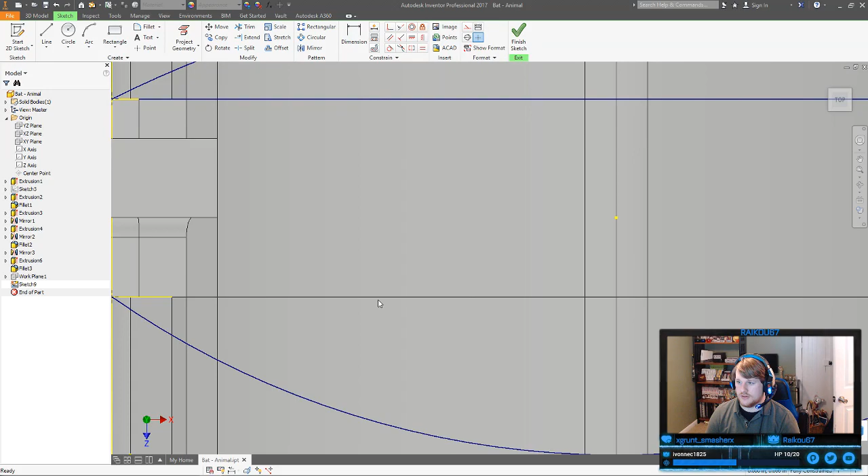Lot, apparently. Maybe I could just project this entire... no, you're not going to let me do that. Alright, we'll try it a different way.

Might have hit the right face by accident before. There we go, both of those. I think an intersecting cut does not do what we want it to do. Actually, if anything, we're actually selecting the wrong profiles.

You're not gonna let me... oh, because there's a missing bit here.

Oh. Ooh, what is going on there? Oh, what is with this lag burst? Should not be having a problem with that.

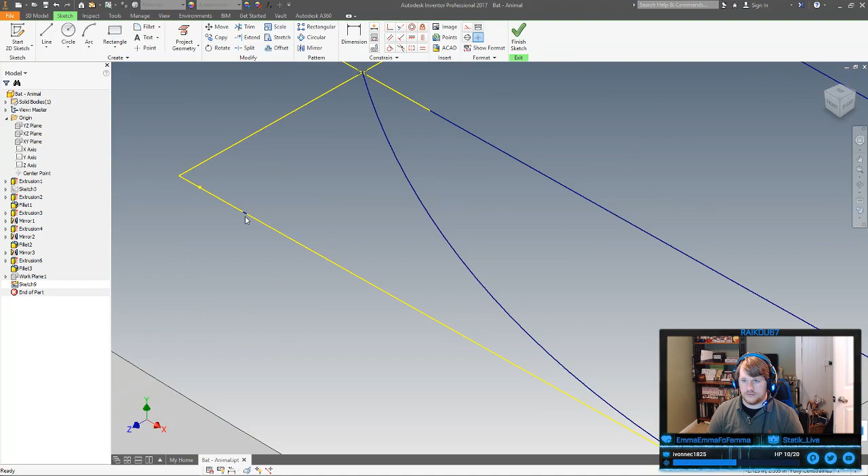Well, how about before we go any further into this, we figure out if this is even worth our time, if it produces a result we're actually happy with. Kinda not really.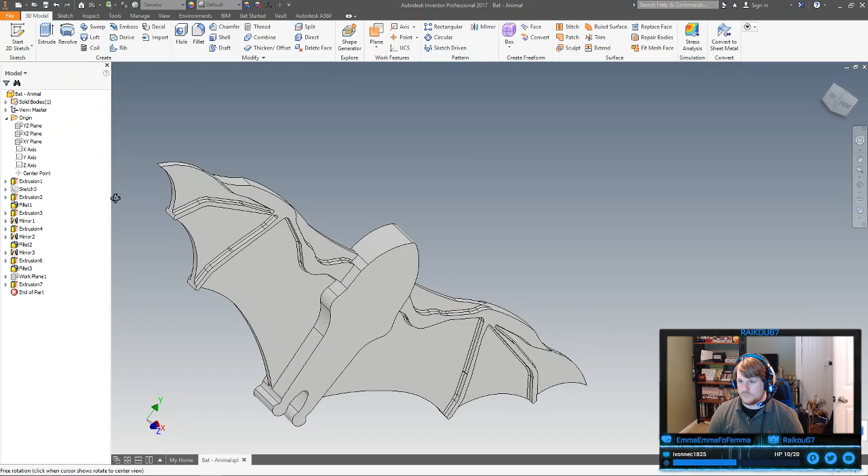I mean, yes, it's a little more curved. Is it perfect? No, probably not. I almost want to do another test with this converting faces thing. So it does not like round faces, no matter what.

Curvature. Hey, wait a minute. This is interesting. What could that do?

Welcome to the chat room. Did something happen to the chat room?

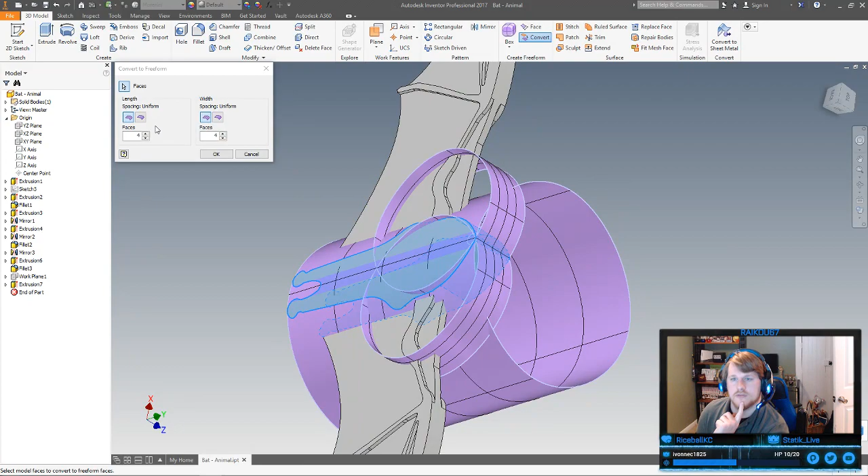Curvature. What does that mean when they're talking about the curvature on that? Oh, it's just faces that does this. That doesn't seem to work.

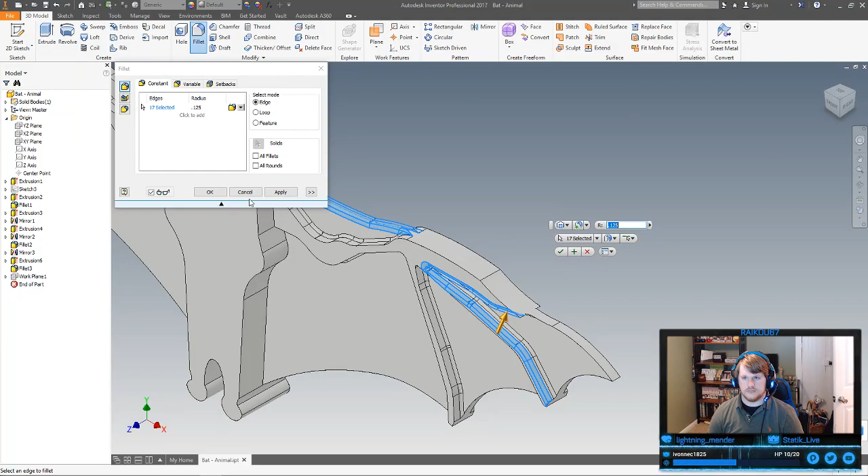I'm not really happy with how this whole curving attempt has been going with that. Might just have to accept the fact that it's not going to be a perfectly organic looking bat. That's another thing too, is that it's still not curved at all up there.

Definitely need more at that point. I can't handle that being so narrow when I'm removing material.

Alright, there should be a locked orientation there and a locked one here. Probably get this tangent now. Problem. Just kind of thicken this a little bit as a cheat.

Let's see if we can fillet this, finally. Barely, but we can do it. Soften up the entire bat.

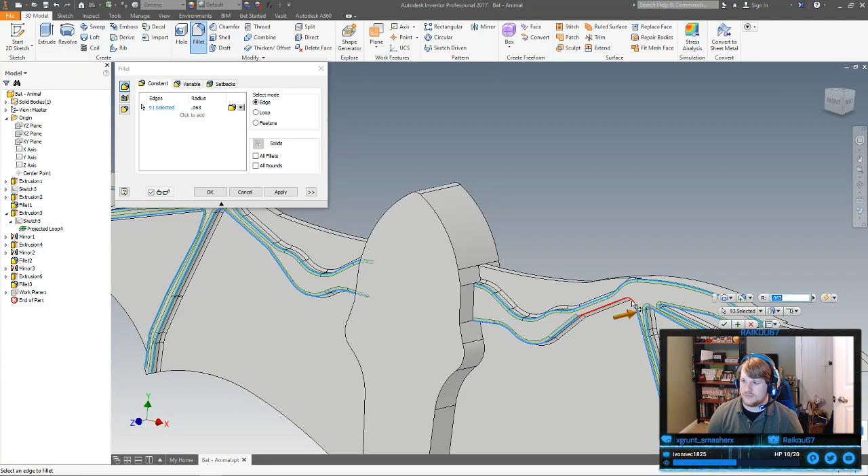You know that works, don't even try and give me that. It's a little softer. Just the tiniest bit.

If we turned off the edges, I need to change the color of this bat. Darker gray or something.

Something that goes against the landscape a little better. It's not bad. The wings only, that is, not the blocky body and torso. It's not too bad.

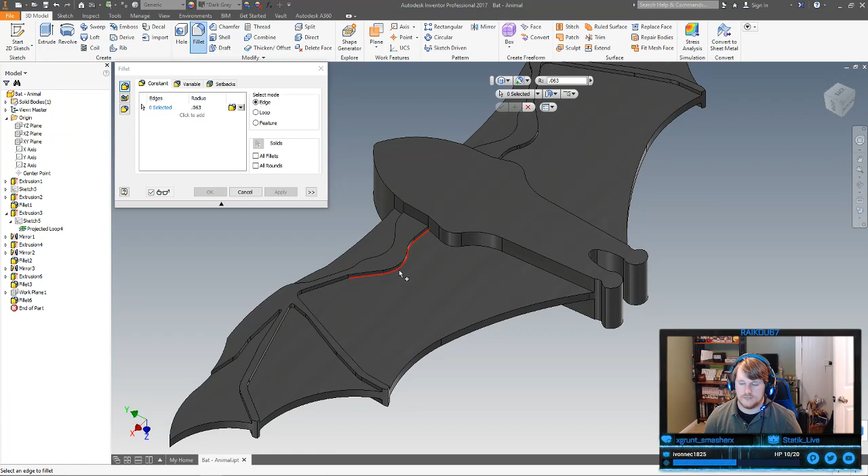Yeah, ironic part is this is something I've actually already gotten rid of once before, I think. At the top or the bottom? No, it's not what I'm going for. I'm going for the fillet that... is it this one? It is.

Oh, but it's at a later time. Okay, so I'm just gonna have to do it again. What size is that fillet?

Not that one, the other one. Oh, that is the one that I was looking at. So this one was the lower one. Okay, it's the same size.

Once more, on the back. Should be even smoother on the back. Hopefully.

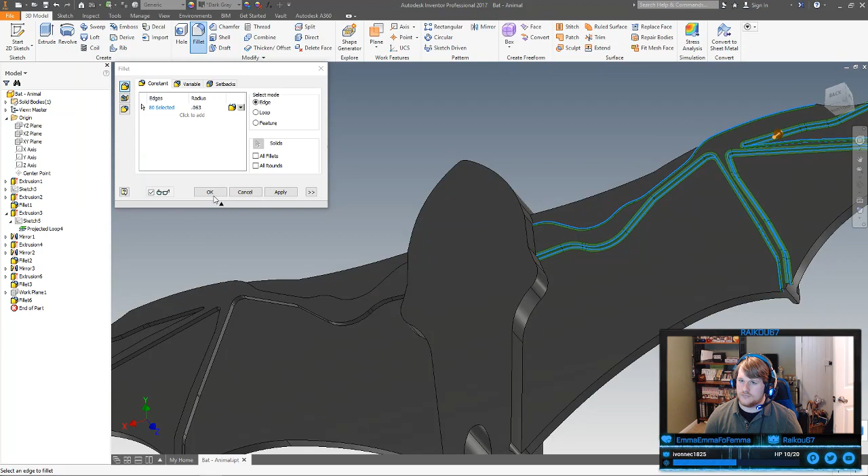Except the successful ones. Just a couple edges didn't work on somewhere. Mirror it.

Yeah, the wings profile-wise are looking a lot better when it comes to the spiny bits. Work on the wings a little bit more.

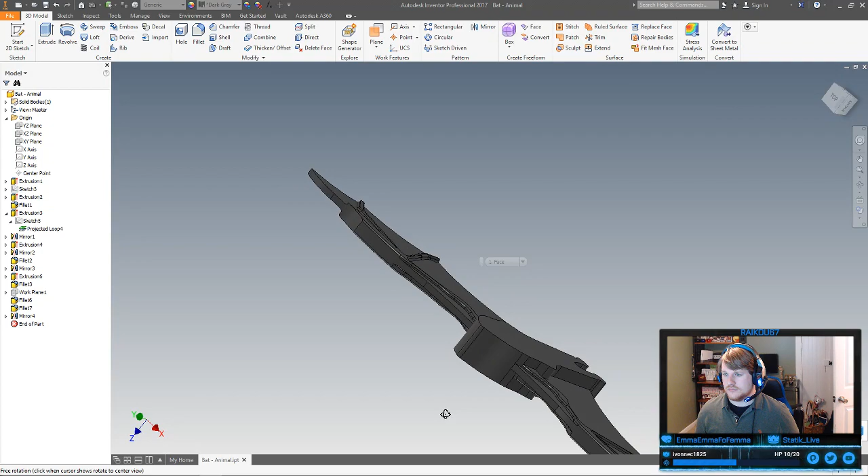What I might do, I might take this opportunity to put a very unique profile on the wings a little bit. I mean, they are... or I could just make them a little bit thinner.

Let's see, to make that a little bit thinner, does it mess everything up? No, because the thinner we get them, the better. We can thicken the body if we need to. Probably should, in fact.

This is unfortunate, as I didn't actually label any of my... anything to do with this bat. Oh, make it .75, 3/4 inch. Got a little bit in the back to play with, too.

Not bad, take a save. Just double checking it actually did. Always save twice, that dang gamer instinct.

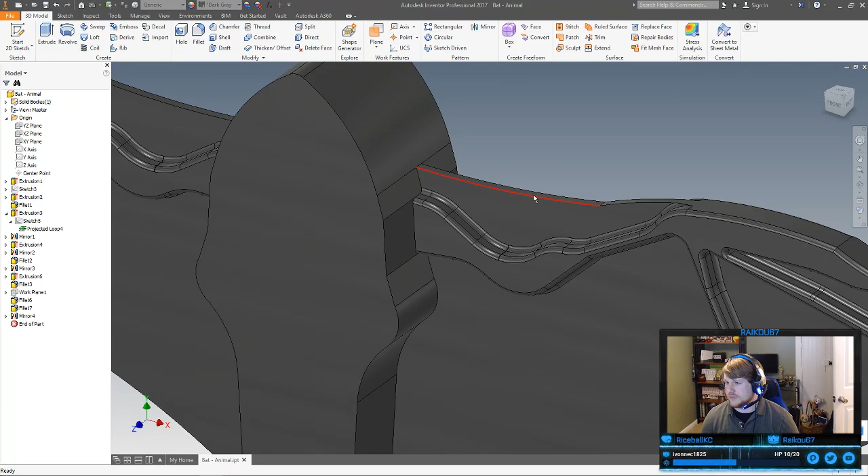Things are looking decent. I believe they should stay thick up here, so if I did do a fillet on them, wow. Double fillet takes that down way too far.

If I did do a fillet, it would probably be just on one side, if it's even worth it. No, not that one, that's kind of messed up.

This is purely experimental right now, just to see how this works, or how it looks, rather. What's this edge doing here?

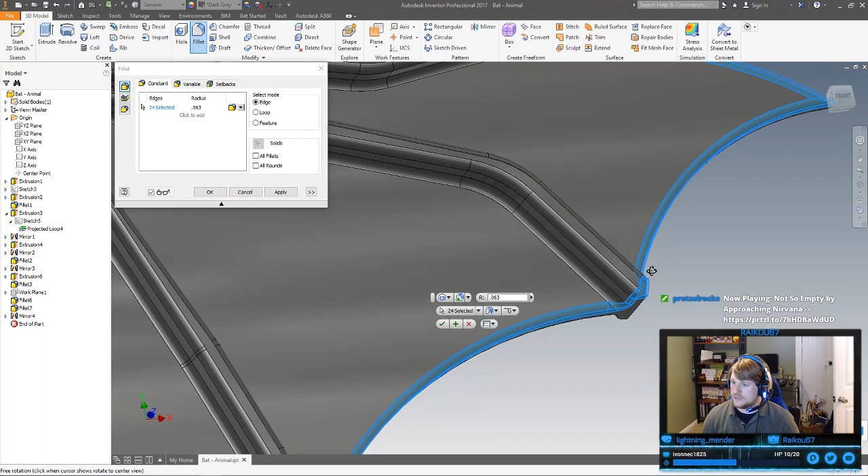Not bad. We will be bending this bat later on to kind of give it that little more of a motion, like it's going in flight. We're just trying to get that profile.

Definitely wish I knew freeform a bit better. Quick time check, we're almost at the end of our time here, so we'll see how much further we can get going. This is today's long day, but it only lasts so long.

Okay, I'm already happy with some of the progress we made today when it comes to the wings. The wings look pretty dang good, what I was trying to set out with, anyway.

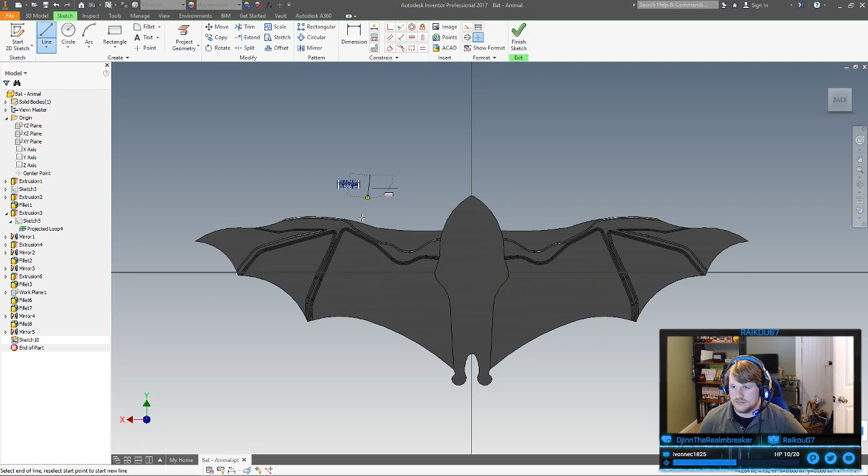I do want to take a little bit of a stab at trying to bend these. Something like just really general. I think a really general line on here, cut into that. Doesn't even need to be a center line, it could just be construction.

Oh, we got both now. Hello. Trying something out here. That doesn't really need to be constrained any more than that. If we try the... oh, where are you? Not revolve, sweep, emboss, under modify. Ah, there it is. Bend part. So the bend line is here.

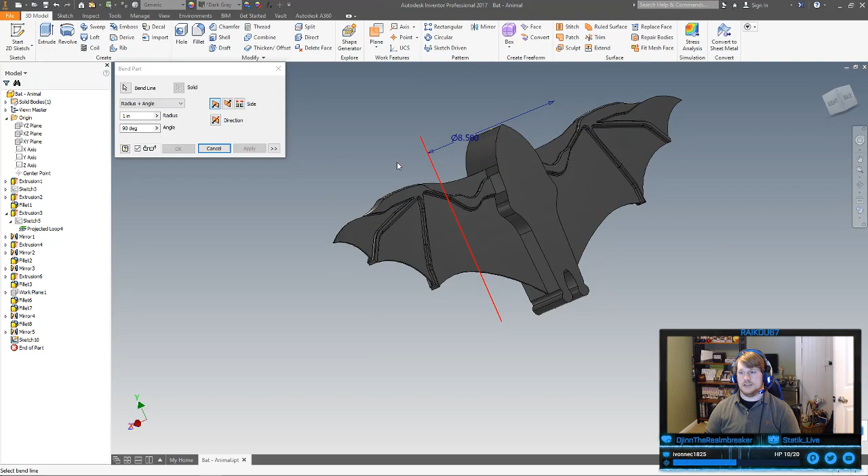This might be calculating that's totally the wrong way the bend is going. Change the bend direction. Yeah, we will be able to bend that fine. Angle will be something more like... I'm gonna call it like 60 degrees.

Come on, work with me. I know there's a lot to compute with that. Oh, we'll just call it 60 degrees, and we'll say that the radius is more like 3. It gives it a lot more general bend. Maybe even more, it'll probably be halfway the distance of the wing at least, and then we'll start bending it on its back too.

A little bit more, maybe even just slightly more. Keep it nice and curved. It's not bad, put it maybe at like a 75-degree angle. Once it calculates, good, check it out.

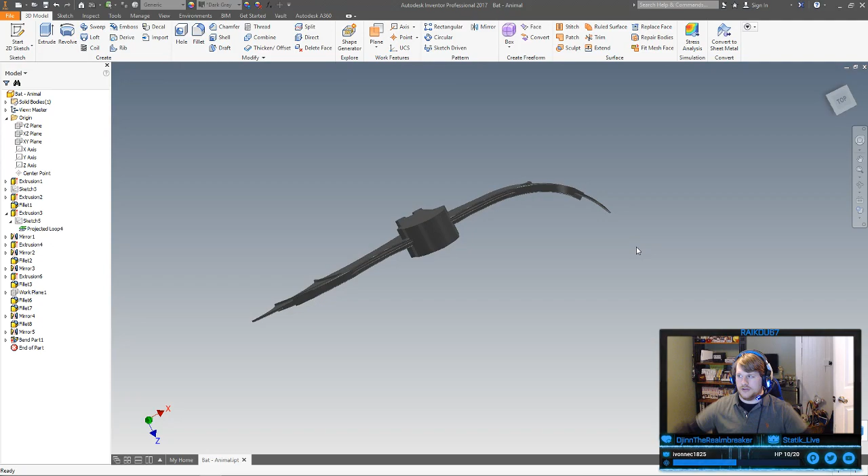Oh yeah, that's exactly what I was thinking was going to happen with this bat. Awesome. So we know that when we have the actual detail and profiling of the bat down, we'll be able to get this nice, flapping look just by playing with that. For the time being, we're not doing that. I just wanted to confirm that with all these curves we're putting into this thing, that would actually be okay.